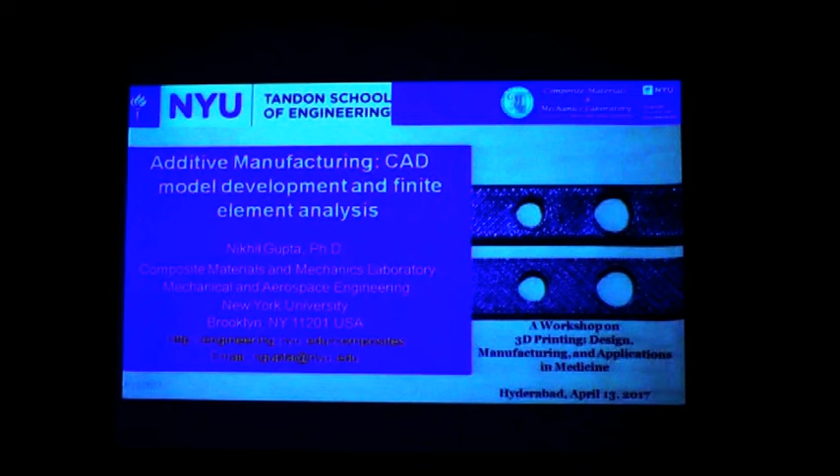So coming to 3D printing, it's a very new technology. A lot of things are still evolving. It's in the development stage, and that's really the opportunity in front of all of us. Right now, based on the needs, we can guide this field, we can guide how 3D printing develops over the years, and then we can make use of this kind of technology for our needs and our patients' needs.

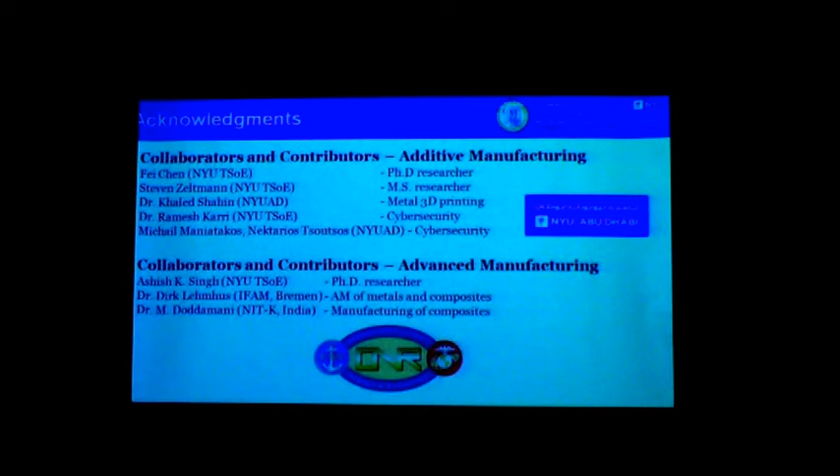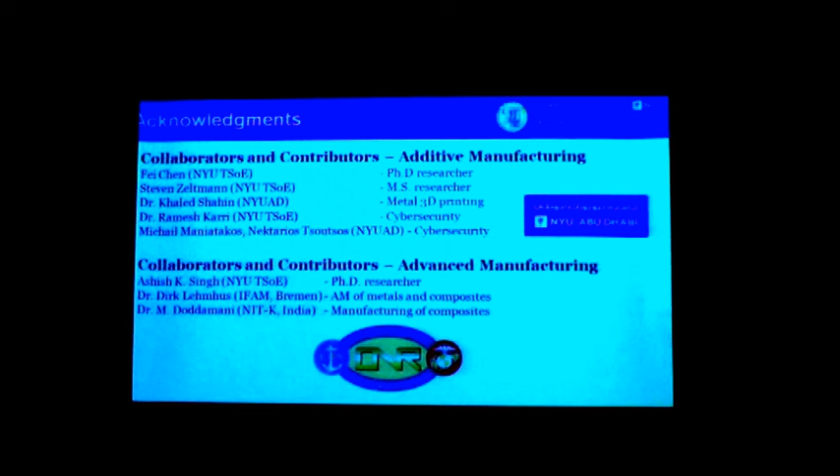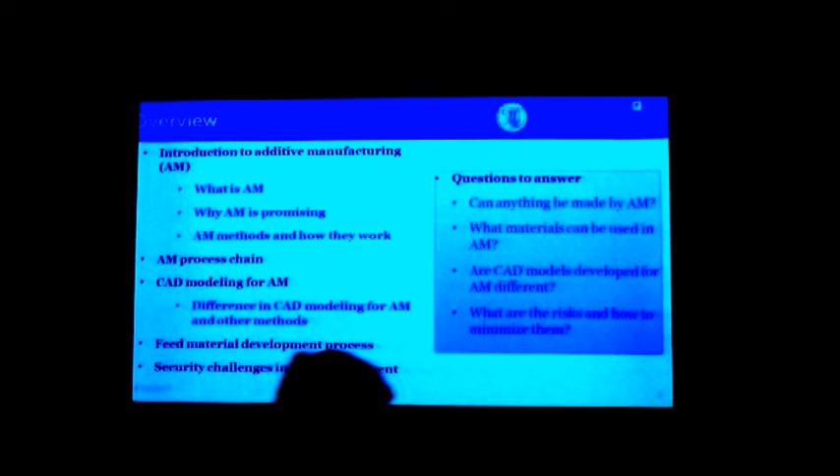And for this talk, I'll go basic because there are more presentations to come up later on. So my presentation will be focused on how we develop the CAD model. And I'll give you an overview of the field on how this 3D printing actually works. And then you can proliferate that into your field of interest to see how you as a doctor can use it for the benefit of your own profession or for the patient.

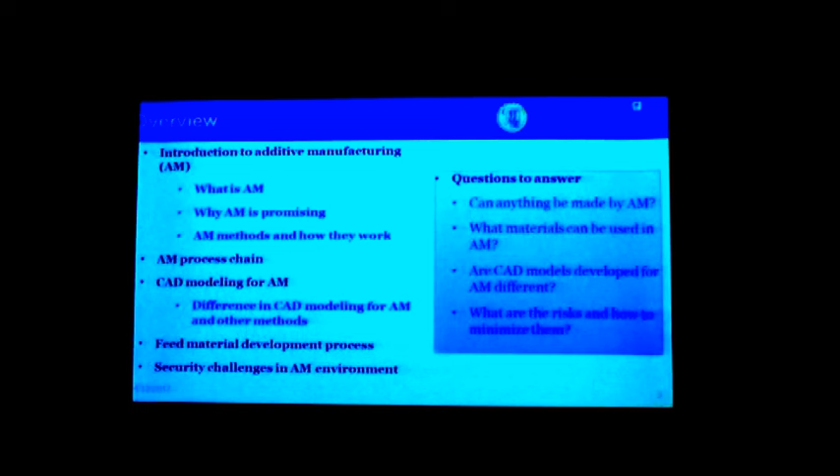So some of the questions I will try to answer. Can anything be made by additive manufacturing? That's the very common thought that everybody has. People say that I'm going to make everything with additive manufacturing that's around us. Should we do it, or even is it possible? So that's one big question to answer. Can we use any material to use additive manufacturing? Again, another big question that people ask.

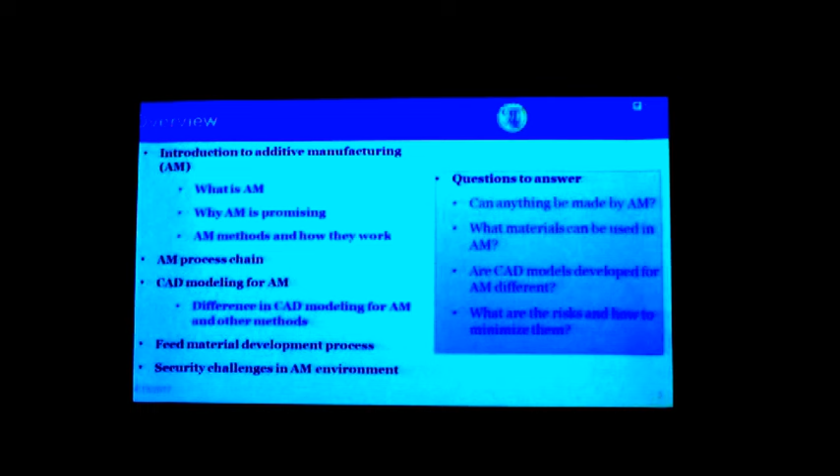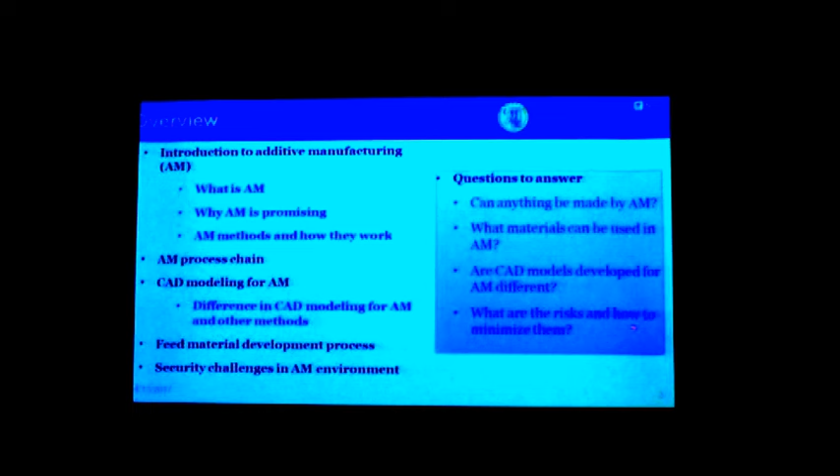Are CAD models developed for additive manufacturing any different? And this is more for engineering students because they take the CAD design courses in their first or second year. But this additive manufacturing is a new field, and that's where they ask this question over and over. And what are the risks related to additive manufacturing and how to minimize that? That's the final thought for these things.

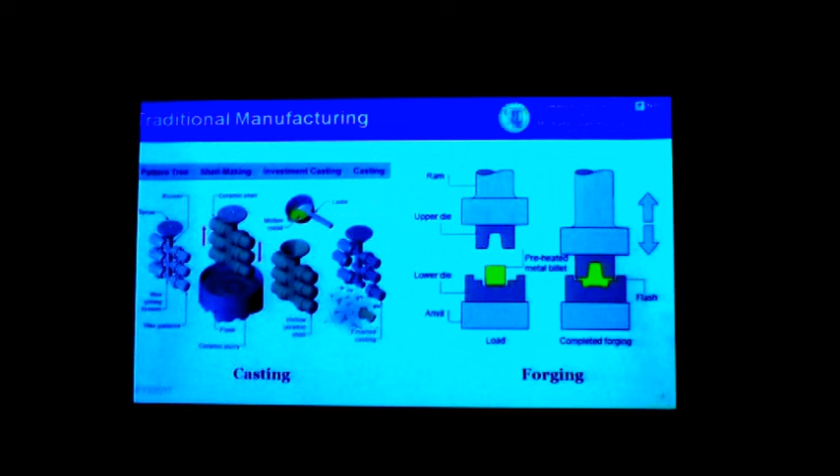And then there is a family of processes, and I just put one of them. It's called forging. Forging means you take a piece of metal and then you hit it as many times as you need to, or compress it at high temperature, and you mold it into a shape. And this is the shape that you finally want. So any kind of implants, not just implants, but tools that you see around you, or any other structures that you see around you, they are made by one of these traditional processes that we have perfected over a large number of years, over decades of work.

There are many advantages of these traditional processes. We can do large volume production. I mean, consider you are 300 people sitting here, all of you will need a set of tools for yourself. And some of these tools are disposable, so you need new ones every day or for every patient. So that's a very large volume. And keeping the cost low for these large production volumes is a big advantage for these traditional methods.

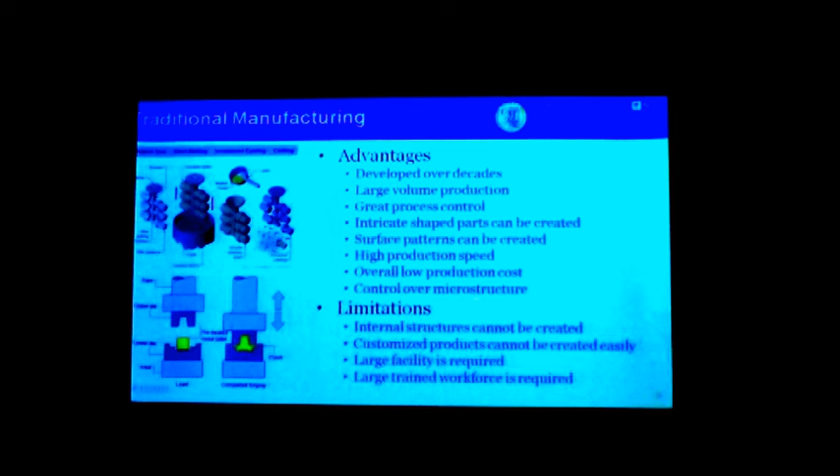We can make intricate shaped parts because over decades we have developed this process and perfected them. So we have a good control over the shape, size, and the quality of products that come out from these processes, and we have great confidence in them. The production speed can be very fast because large volume production will require us to have very fast speed, otherwise things become expensive. And then we can have control over the structure inside these materials, so that they give you properties or performance that you are looking for.

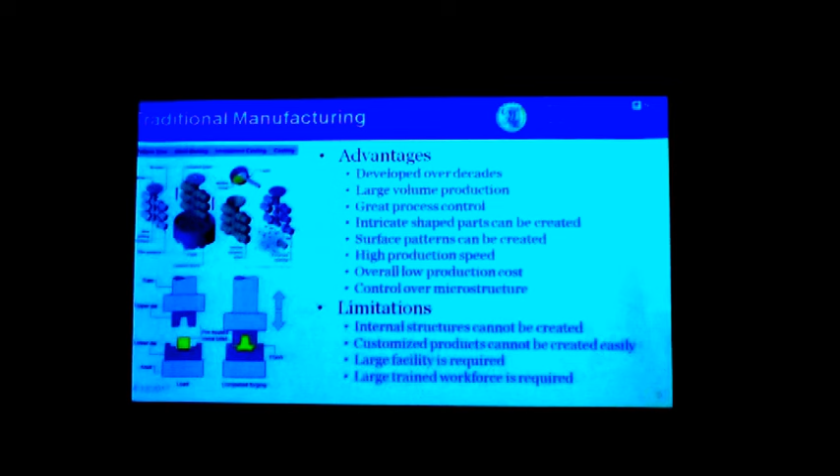But these methods have some limitations as well. We cannot make parts that have some sort of internal structures. We can only shape them from outside, but there is nothing we can do inside. Additive manufacturing is a layer by layer manufacturing process where you can make pretty much any internal structures that you want. So for example, if you want to create some hollowness inside to make a part light, you cannot do it with a casting, but you can do it with additive manufacturing.

You can also customize the parts very easily for every single patient that you want, because you will be creating these parts individually in an additive manufacturing machine. So that's a big advantage that you cannot have in casting, where all the parts will have to have the same shape in a mold. If you want to change the size of a cast part, then you would have to machine it further. So that adds cost.

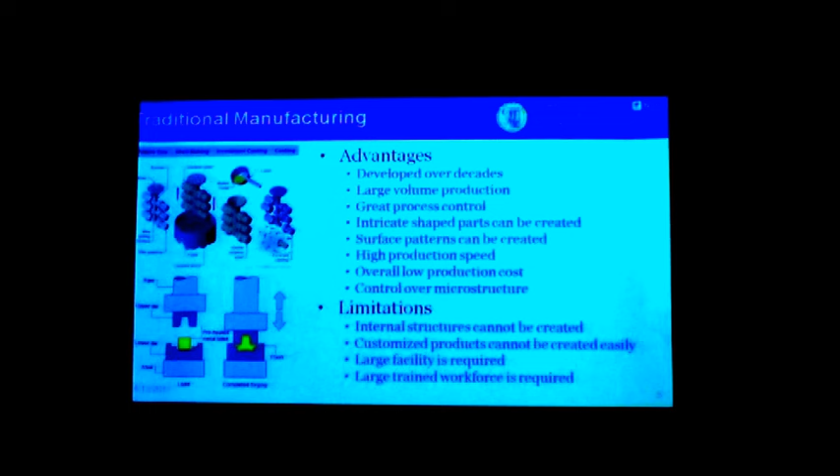We need a large facility and we need a large trained workforce for some of these traditional manufacturing methods. But in additive manufacturing, the tools are limited. You can get trained with them and then you can take advantage of those tools very easily and get forward with that.

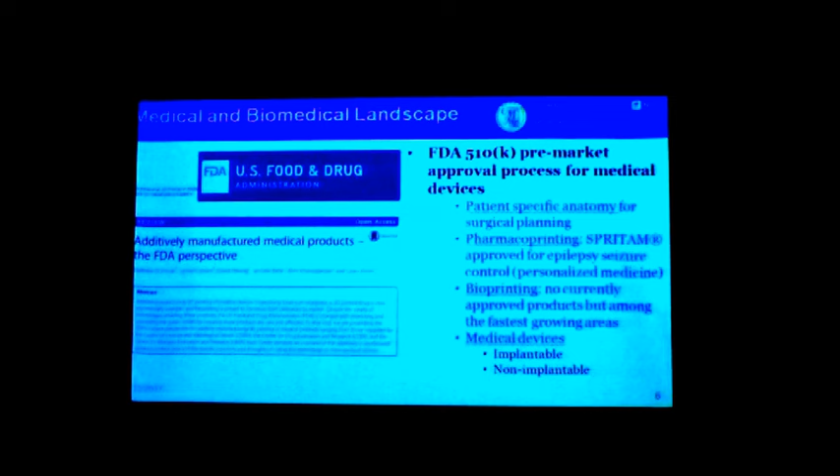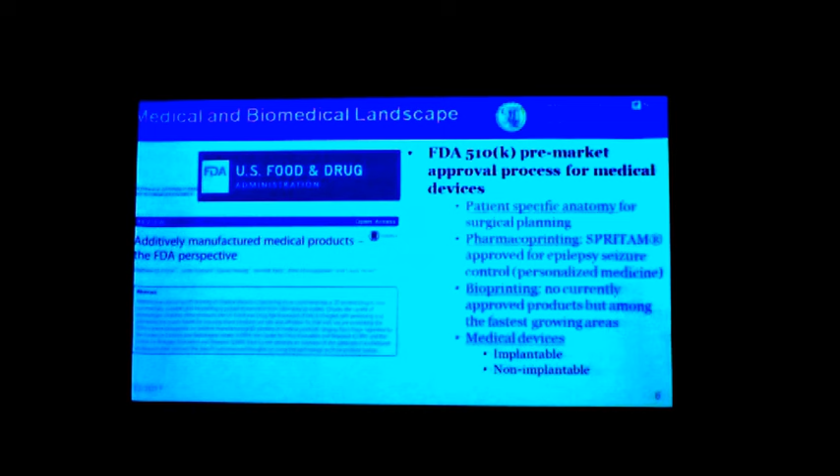Pharmacoprinting is the second area, where now there is a drug which has been approved, in the realm of personalized medicine. More drugs are in the pipeline. In bioprinting, like printing of organs, hearts or arteries, currently there is no approved product, but these products are coming. And it's not just that they are not approving; the community itself is not able to develop things on which they are confident. But this is the fastest growing area of research right now. So if anybody wants to come into basic research, this is the area expanding the fastest.

And then there are medical devices. You heard this morning about microfluidic devices and other things; that's where these devices come. They can be implantable or non-implantable. Non-implantable devices are very easy to get approval for. Implantable devices take more scrutiny, so they take a longer timeline. But the 510(k), you can read this regulation from FDA, says that within 90 days a device has to be approved, or at least a decision has to be taken about approval or disapproval.

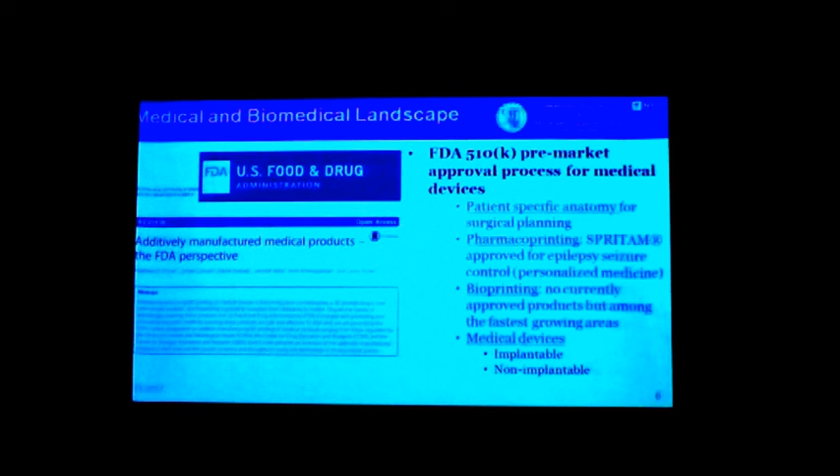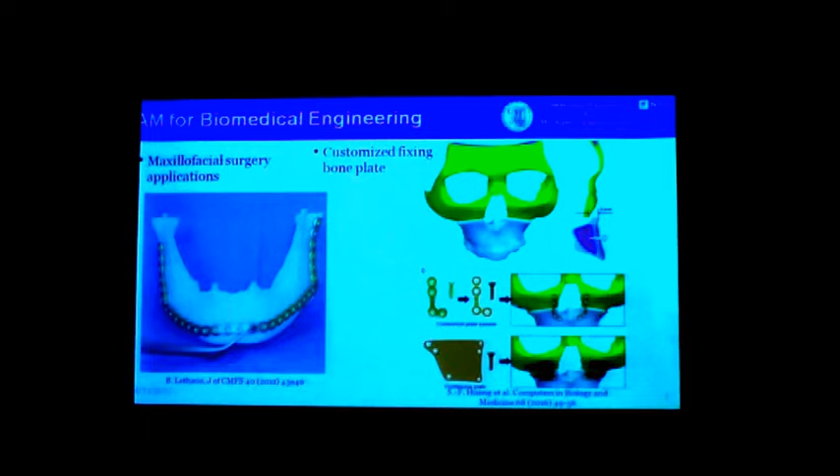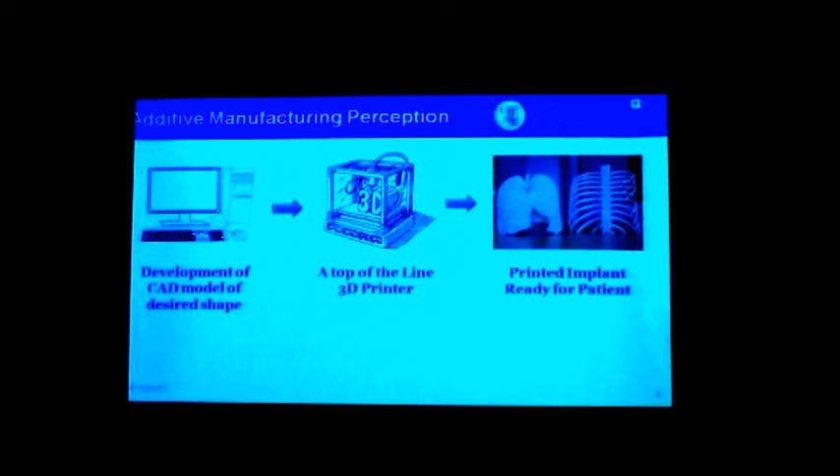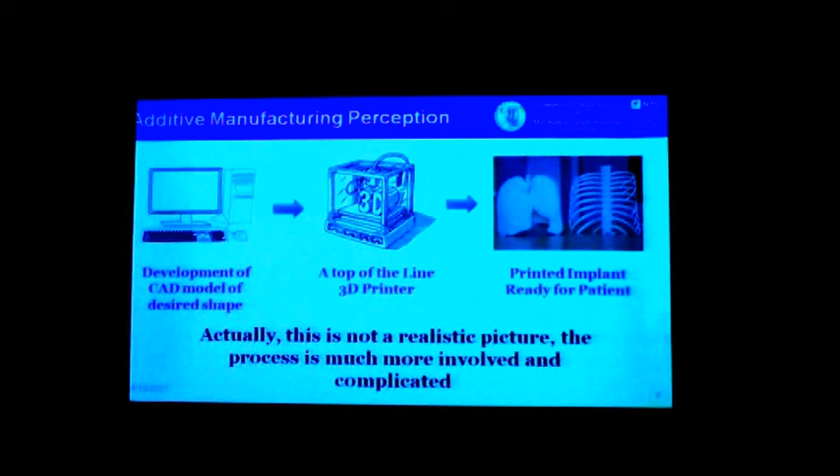A lot of people think that this is what 3D printing is: you make a CAD design, put it into the 3D printer, and the printer will just give you any design that you want. But this is not realistic. There are a number of steps between CAD model development and feeding into the 3D printer. And the printer itself is a very complex operation. Printer designers have put a lot into the control system so the printer gives certain output, and you have to understand quite a few of those things before you get high quality output, especially if you want to implant them into the patient.

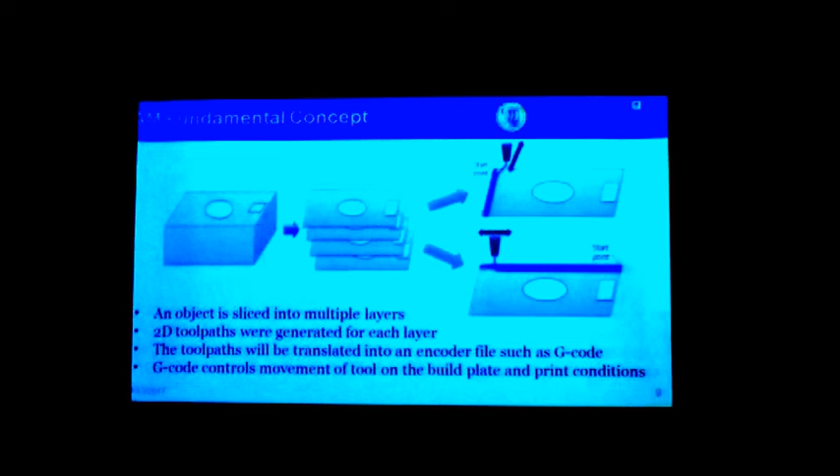So what is a process chain? You have maybe done CT scans or MRIs of patients and received the DICOM files. But this process is opposite to that. Here we have a 3D model that we will try to print at the end. We create 2D slices from this 3D CAD model, and then each of these slices will be printed. As you can imagine, printing can happen in many different directions, and each direction will probably give you different properties. That is something to understand very carefully.

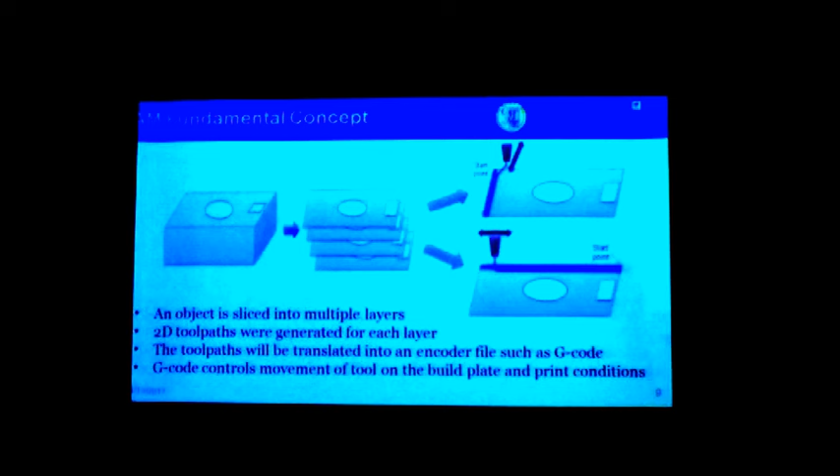You can also imagine that when you slice something into thin slices like this, some information will be lost between the slices. So how far apart these slices are and their thickness are extremely important in getting the output you desire. The 3D printing process chain is very long if these steps are not conducted correctly. Now what happens after you print the part?

You have to take it for testing. Right now testing is not your responsibility, because companies selling these products to you have done this testing. They sell the same product to a large number of doctors and hospitals, in many countries where FDA and other agencies have tested them. But imagine now you are creating this part, which is going inside the patient. Who's going to take responsibility for the quality of that part if a failure occurs? It's going to be your responsibility.

So how do we create this information about the quality? We can do imaging, non-destructive evaluation, or we can create, say, 5 replicas and test 4 of them in different ways. We can even do destructive testing on 4 of them, and the 5th one can be implanted. It will increase the cost, but it will give you more confidence in the structure.

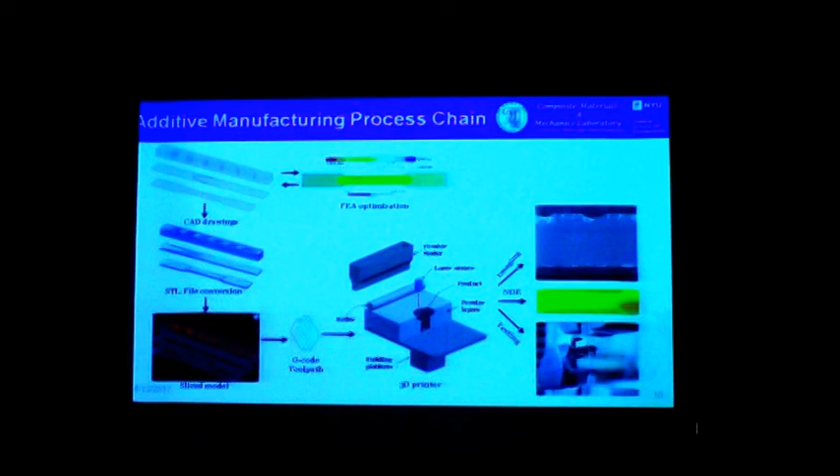So this is more detail about how we test these things. Microscopy is a very common example. And microscopy of materials is a little bit different from medical microscopy because your samples are mostly tissue samples. They require a microscope with light coming from the bottom, and you have the eyepiece on top. But materials microscopes have a different structure. The eyepiece and objective are both on the top. So it's a little bit different microscopy procedures there.

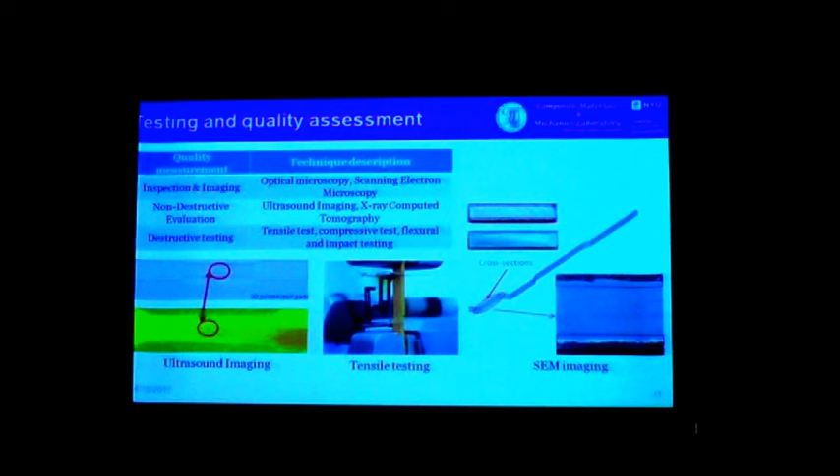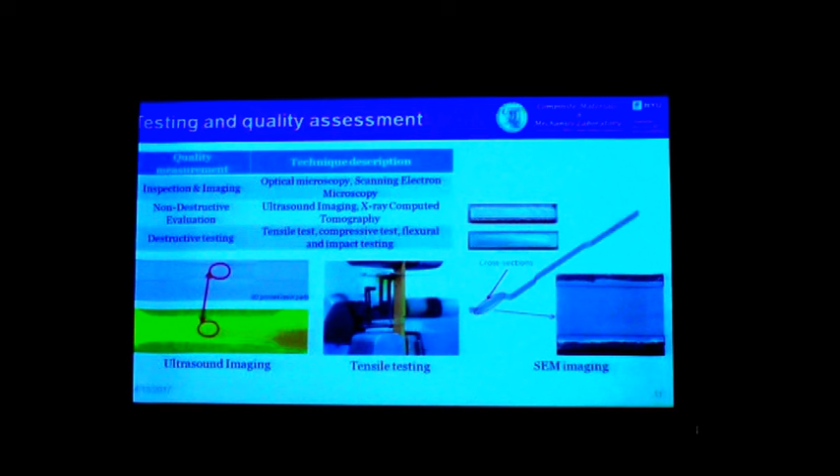But then non-destructive evaluation techniques like ultrasound, we use the same technique as material scientists. And you can do X-ray and tomography techniques in a similar manner. So a lot of these existing tools can be taken for the implants, not just the patient, but also for implants that you create here. All it needs is maybe collaboration with radiologists or maybe learning a little bit more about those techniques. But it is possible in your given setting here.

Now a lot of people think that the printer which we have here, that's what a 3D printer is. But this is just one example of all these printing technologies which are out there. So Professor Dotamani is going to show you 7 different categories of 3D printing technologies. Based on these 7 categories, people have come up with over 20 different additive manufacturing methods. The most common one is the one that you see here. It's called fused deposition modeling, or FDM printers.

What it does is it takes a filament, a thermoplastic polymer filament, heats the filament to make it less viscous in this case, and extrudes it out from a nozzle to create the structure that we are looking for. But there are many other technologies out there. Powder bed methods are getting more and more popular because they can give you better quality products with finer features if you require them. But these laser-based systems are more expensive compared to the printer that you see here.

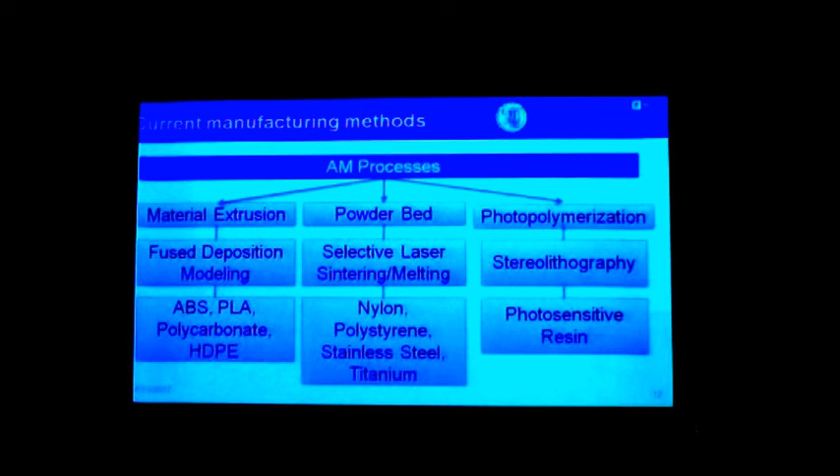So just to give you comparative numbers based on US numbers, a printer like this will cost about $1,500 in the US. And a similar printer with a laser-based system will cost almost about $300,000. So that's a remarkable difference here.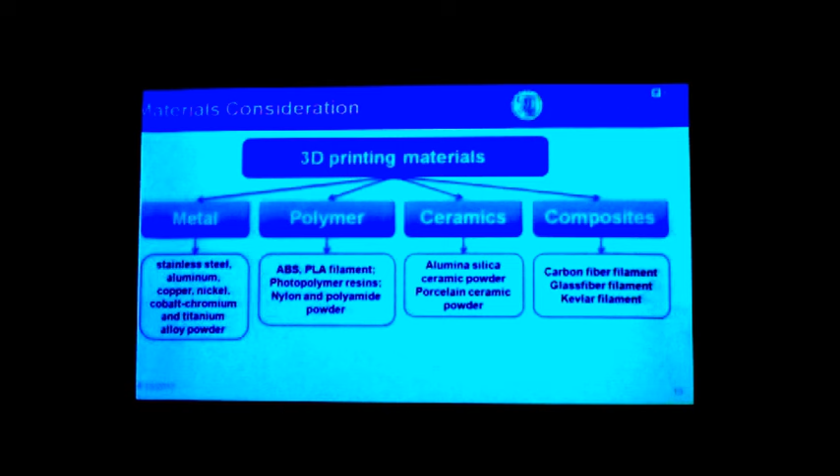And the type of materials that you can print, pretty much any category these days: metal, polymer, ceramic, or composites. But within these categories, the variety is sort of limited right now, but this is where a lot of research in material science is going. So I don't think 5 years down the road materials are going to be a limitation for this additive manufacturing field. Biomedical applications are the biggest beneficiaries here, because a lot of these materials that you see here, stainless steel, cobalt chromium, and titanium, are already developed for additive manufacturing.

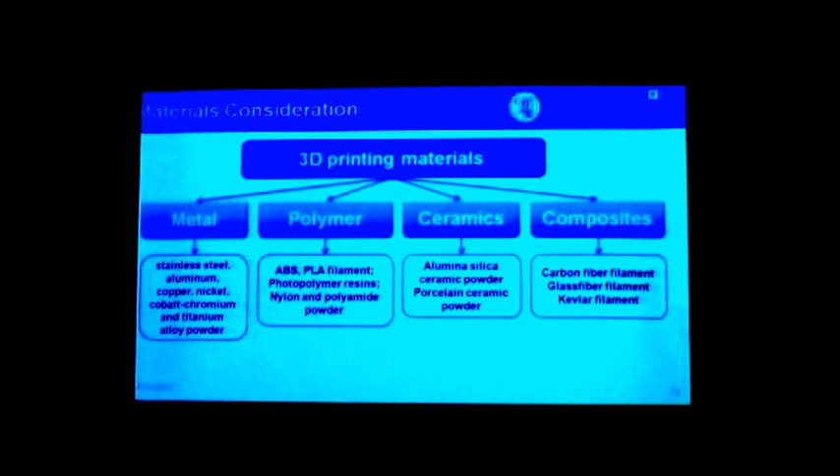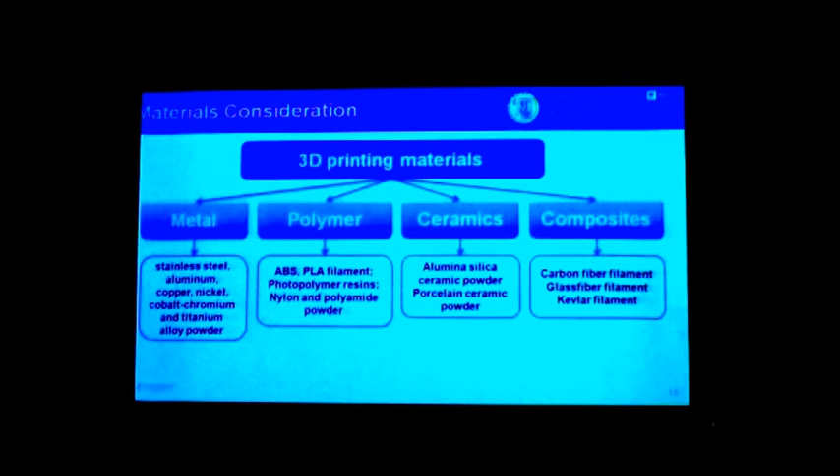And you know why they have been the focus? They have not been the focus because of their application in biomedical, but because of their applications in aerospace structures. But biomedical applications are direct beneficiaries of these advancements. Ceramic printers or multi-material printers are again very common these days in dental schools. So NYU Dental School specializes in multi-material printers, where you can mix two different types of polymers, or you can mix ceramic with polymer and create implants out of that.

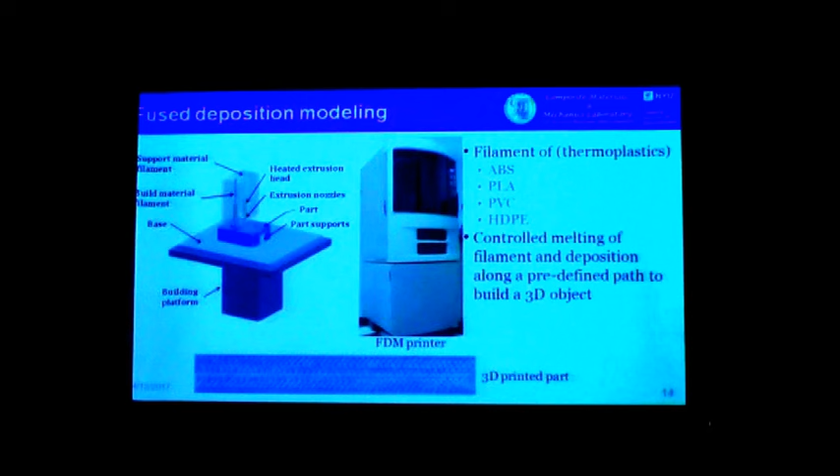So this is the first common type of printer, the fused deposition modeling, the kind of printer that you see here. This is a more industrial version of this printer that we have. This one costs about $50,000. And I would encourage you to look at this printer carefully to see how it functions, all these designs that are being printed. You can try to handle them, look at them more carefully. These printers are mostly specialized for ABS, polylactic acid, polyvinyl chloride, and high-density polyethylene, those kinds of materials, many of which are already approved biomaterials.

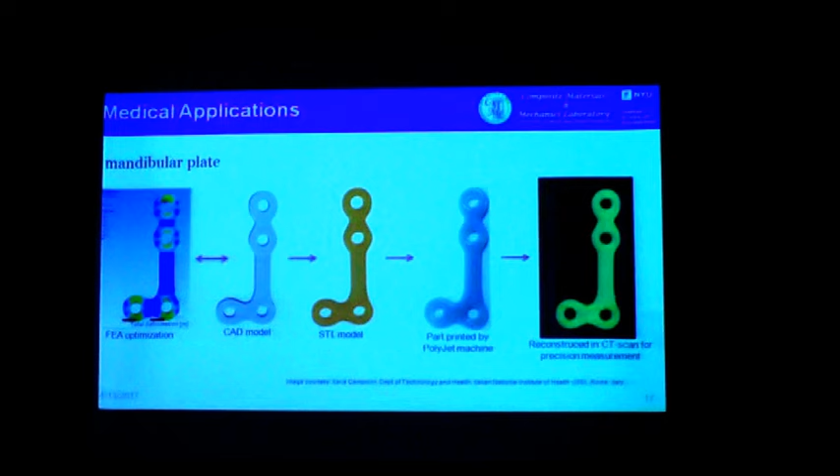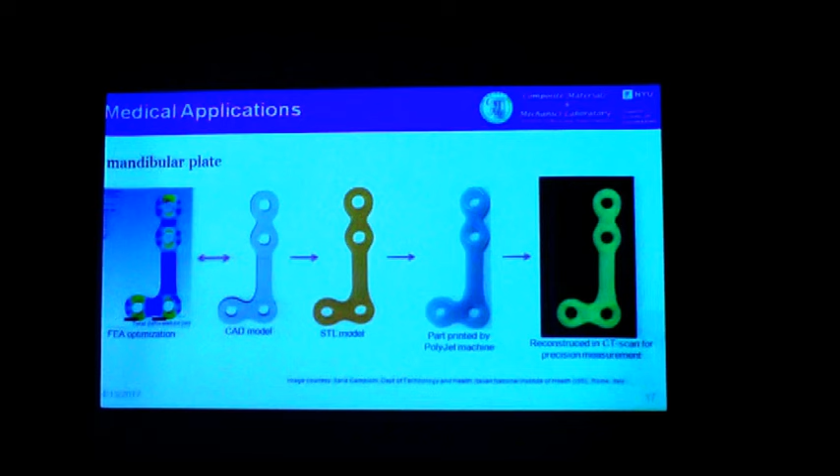Different types of printers that you can use to make them. And one of the examples based on which we created an example that I'll show you in the next few slides. Very simple geometry, just 4 holes and not many contours here, but the idea is to show how the holes make it complicated to get the additive manufactured parts. So when the complexity of this geometry is the one that we want the additive manufacturing for, we really have to understand this process well in order to get the geometry right.

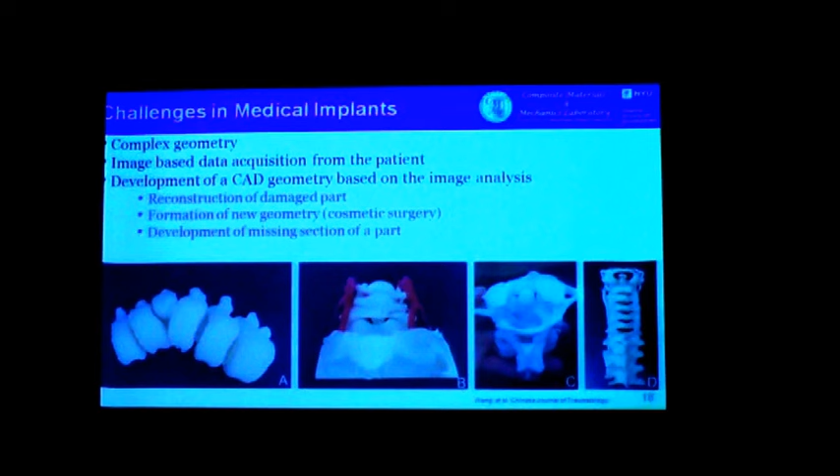And these are some examples I took from literature, where people have been using this additive manufacturing. Sorry. I think it jumped a few slides.

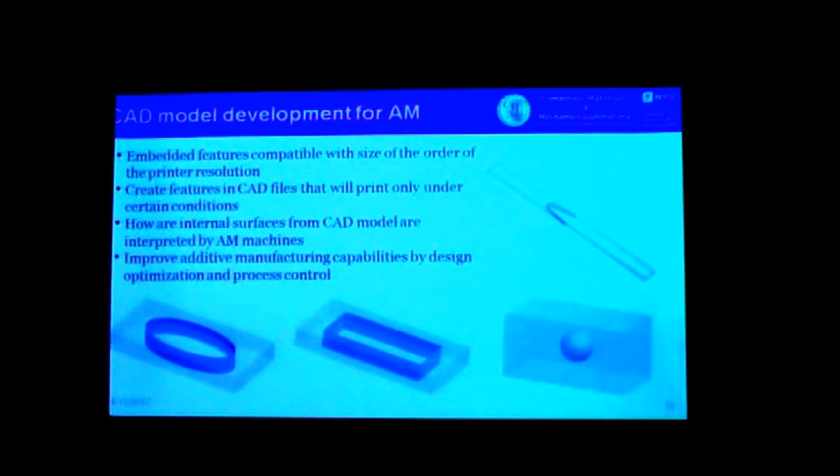So this is where I will cover a few examples of how we can create. We did the tensile testing.